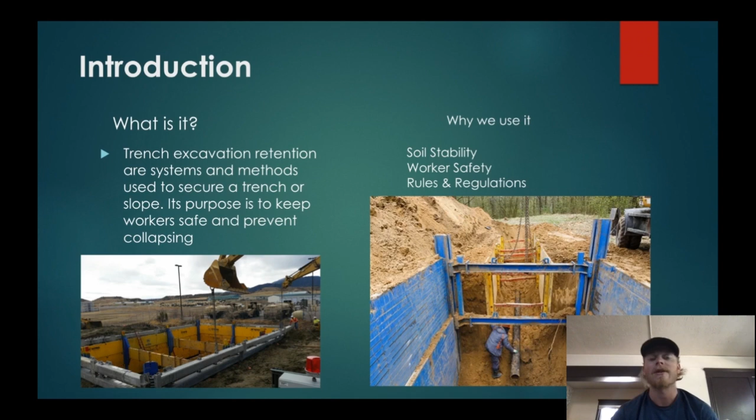Speed Shoring is a really cool company. They're the industry leading corporation for trench retention systems. They do a great job of offering a variety of different systems from boxes, speed shoring, trench boxes, slide rail systems. They kind of do it all. They got a lot of different stuff out there, and they have a great reputation from workers and OSHA. They're very safe, they're effective, and they work really well. I guess they're also very easy to install and dismantle.

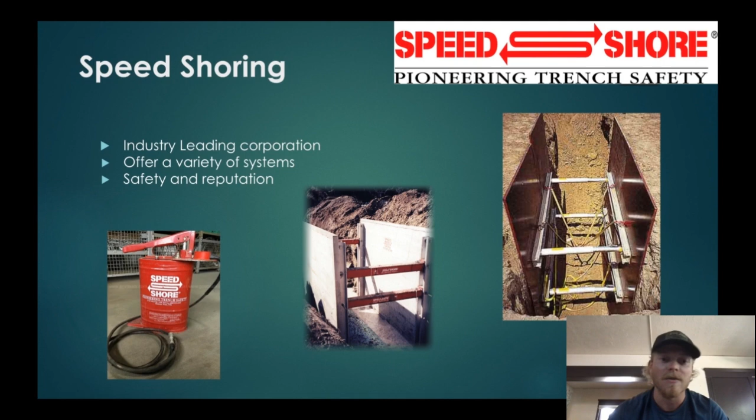All right, moving on. Trench shoring and trench boxes. What's the difference? Well, trench shoring is more of a, I want to say, stationary, temporary structure, but it's there longer than a trench box in most cases. Trench shoring totally prevents a cave-in from happening, while a trench box will keep a worker safe if a cave-in does occur. So shoring won't let a cave-in happen. Trench boxes are just that extra line of defense for the worker in case a cave-in or a collapse did come up.

They're used in many different situations. They're used for a lot of utility work, embankments, retaining walls, foundations. They can be used in a lot of different ways. They're very universal, and they're primarily made out of steel and aluminum. However, there are some wood varieties, but they have to be shoring rated. You can't just use some random piece of OSB. Like I said, they both protect from cave-ins, but trench shoring will disallow that from ever happening, while with a trench box it could happen, but it's going to keep the worker safe.

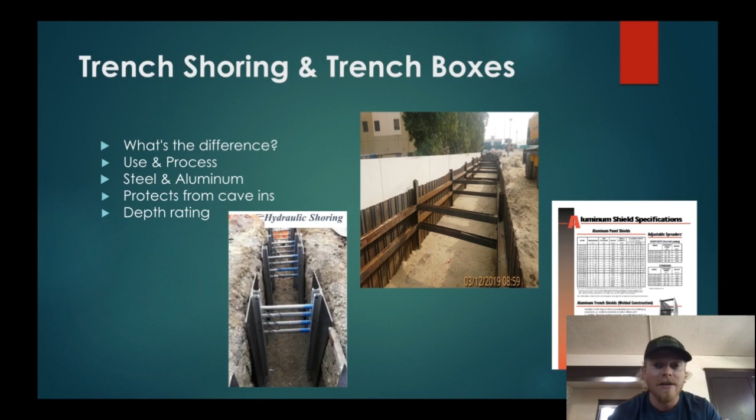Another thing you're going to want to look at if you're ever getting these for your project or ordering them is the depth rating. Every manufacturer comes with a depth rating, and just how we learned in class, the further we go down in the soil and in the trench, there's going to be all that weight pushing from the top down at the bottom of these shields and boxes. So you got to look at the depth rating to make sure your shield can withstand that amount of weight. So that's just something to keep in mind. Check out your depth ratings, look at the different systems, see what's going to be most beneficial to your project.

These are great for different scenarios, like working in a confined work site where you got a building right next to you and you got to put a foundation or something right there.

These will allow you to support that load right next to that building without taking soil out or compromising the strength and structural support of that other building. It also reduces the size of excavation just because you're digging straight down into the hole. You don't have to do a slope or anything. So it does reduce the size of excavation.

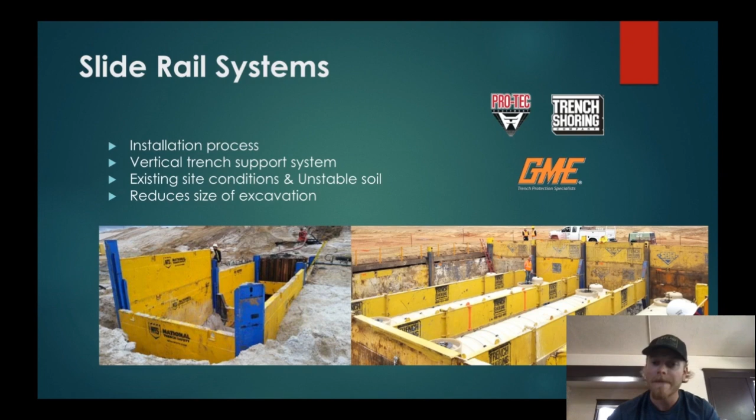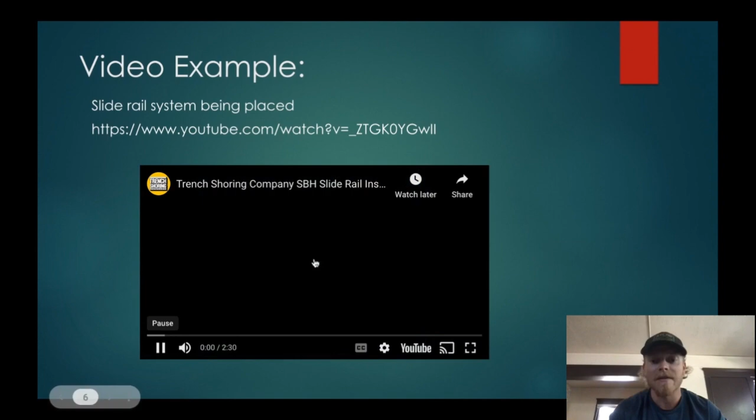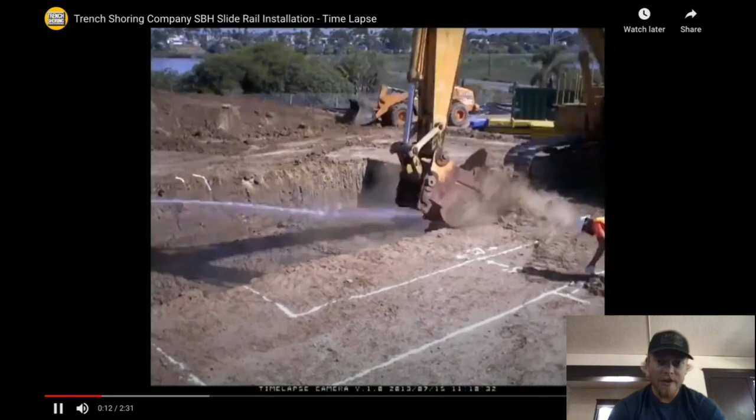Now we're going to watch a video example of a slide rail system being put together, and you guys will be able to see kind of the process of this. I'll speed it up a little bit so we're not here forever. So as you can see, they're starting excavation, and then here soon they'll probably start putting their piles down. There they are. You can see the blue ones. So they insert those, and then they just kind of work their way around the perimeter. There they add a cross bracing just to keep that soil from pushing back in.

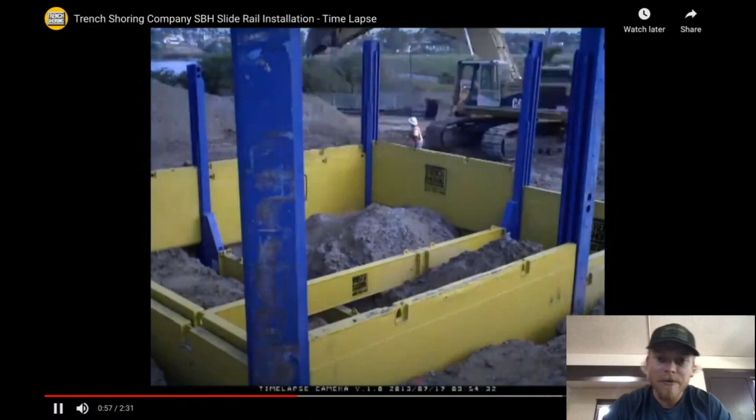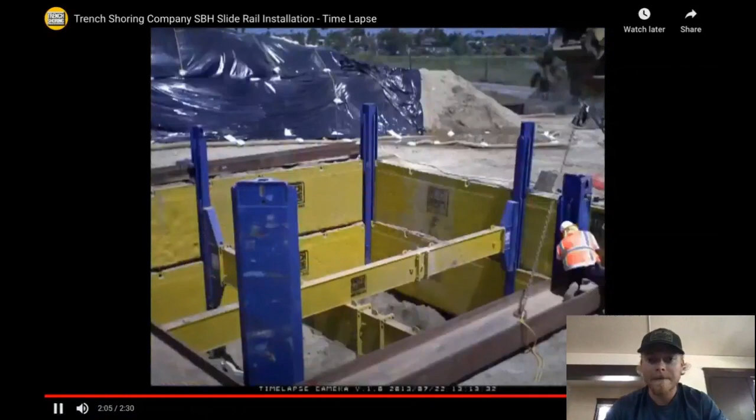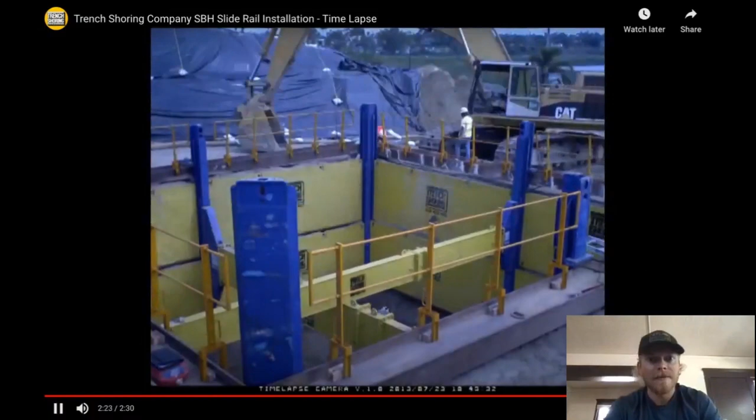And it looks like they got a pretty small crew. So these things do go pretty quick if you got the labor force, but they're very useful, and they do a great job of what they're designed to do. We'll skip over a little bit. So as you can see, they're way down there now. Got their safety fence up. That's good. Got their stockpile covered. That's good.

So yeah, now we're going to turn it over to Brian. He's going to go over the equipment we use on these different methods, the pros and cons of each method, and also some safety considerations. So that's it for me. Thank you.

How's it going? I'm Brian Kaes. I'm going to be talking about some of the equipment used in speed shoring, trench boxes, and slide rail systems. Obviously, you're going to use excavators. These are used for digging the trenches themselves, as well as placing the shoring or the trench boxes into position and moving them. Cranes or other lifting equipment would be necessary depending on the depth and the weight of the equipment you're trying to set in there, especially if it's a lot deeper of an excavation, because that'll be a lot harder for the excavator to reach. Compactors to improve the soil characteristics on the outside, and vibratory hammers. Sometimes these systems are accompanied by sheet piles or other piles, depending on the soil type.

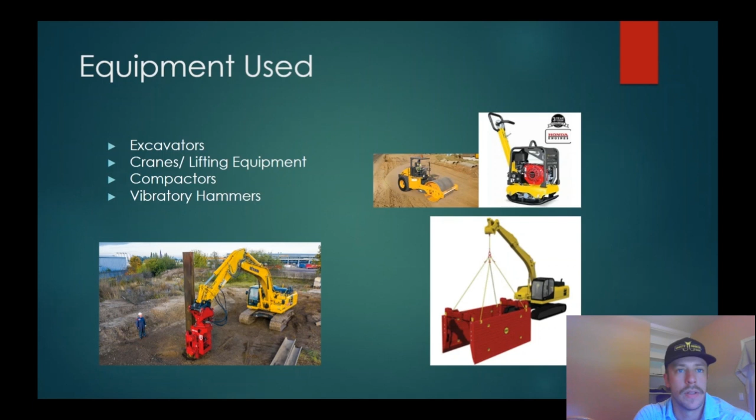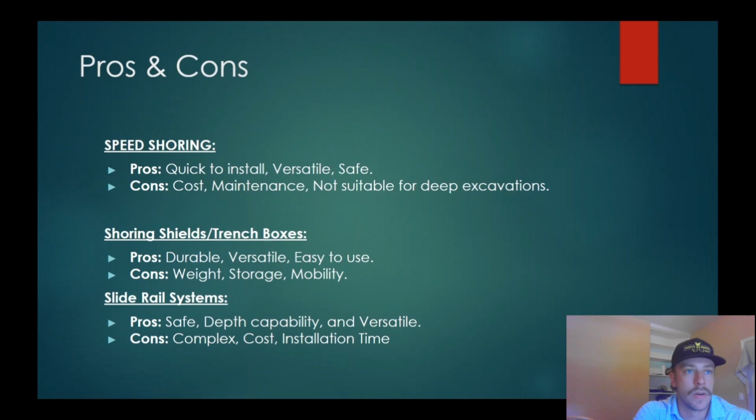And slide rail systems. The pros are they're very safe. They're capable at very deep depths, and they're very versatile. Some cons: I think it takes a qualified person to install them. They're expensive, and they take quite a while to install correctly. And for safety considerations, obviously, if you're setting in trench boxes, you're going to want to know your load limits and your pick points. And at our job site, they require you to have a lift plan if you're setting it with an excavator. Soil analysis. What kind of soil are you in? You want to know that you have the right system for the right soil types.

Make sure it's installed properly. If it's not up to the engineer or manufacturer standards, it could fail, and you definitely don't want that in a trench. Access and egress: allow one or two points of exit or entry to each of these trench boxes. You don't want workers getting stuck down there. And pay attention to the weather and what's going on. If it's real rainy, you might not want to stick guys down in a hole like that, especially if there's seepage or something coming in under that. But that's pretty much all we got.